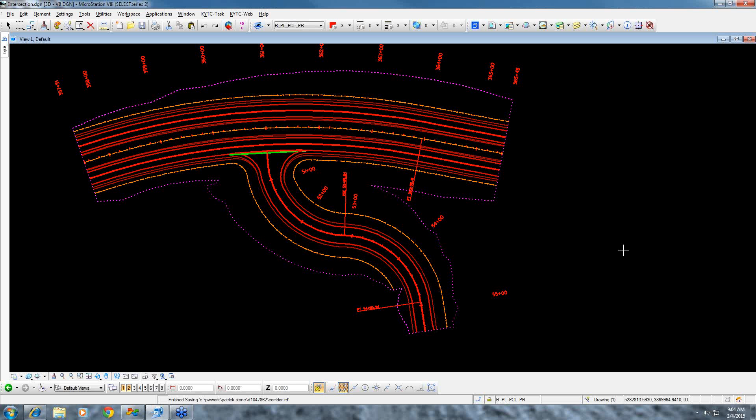First thing I want to show you is the area that we're going to be modeling. We get a lot of models in here that are just terminated right at the end. You just run this corridor, the approach corridor, to the mainline corridor, and they just terminate without any radiuses on them. And when you're cutting your cross sections and doing your quantities, you're losing this area right in here for the quantity.

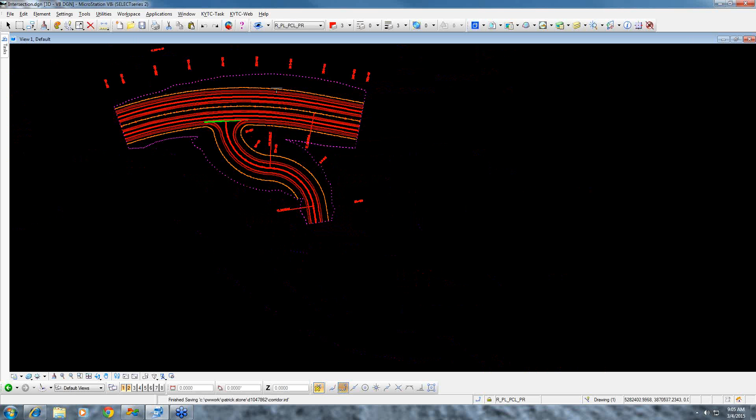So anyway, whether you buy into modeling the radiuses or not, I'm going to show you how we do these, and we'll go from there. So I've already modeled the left side of this approach. And when you're standing on it, the stationing on this is running left to right, of course. And I'm going to be talking about the left radii and the right radii.

You're standing here or you're driving down through here. This is going to be on your left, this is going to be on your right. I know most people understand that, but just wanted to point that out to avoid any confusion with which radiuses we're talking about when we're going through this.

We're going to be using the multi-center curve command, and we'll use the three-center curve. I know it's kind of ironic, but that's what we're going to do. And I wanted to point out another thing as a side note.

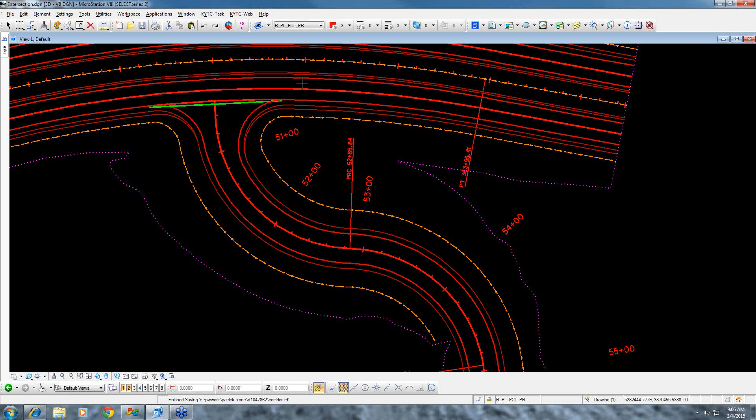If you go through and you model these, the approach is in a curve, the main line's in a curve. Now, if you just go through and model this and use secondary alignments where it's going to come out and hit this, you're going to have this area in here, as you can see, where you're not going to get all the way up to the edge of pavement that we want.

So in this process, what we're going to do is make a corridor over here. We would make a corridor here, corridor here. We've already got an approach corridor and a mainline corridor. And I'm going to show you how we've been doing this with the template. To go out, we're going to intersect the edge of pavement coming up here as a corridor point. And then at this point, we're going to come down here and intercept the vertical and horizontal alignment of this road.

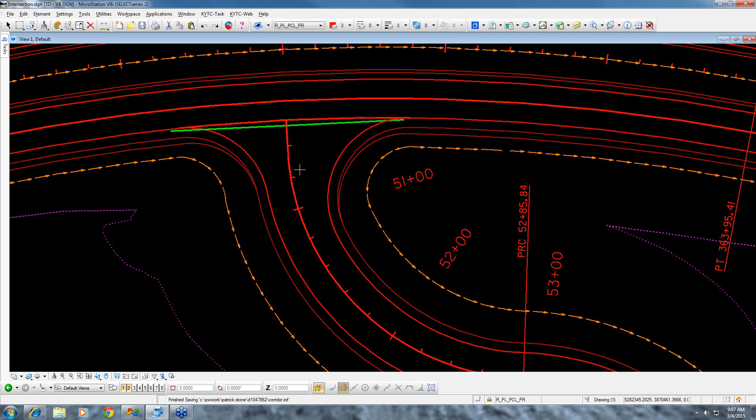And this is the same method I'd use on my entrances or any kind of approach, entrance, anything. I like the 3-center curve. It's pretty handy. First thing I want to do is show you the templates that we're going to be using. So let's pull up. And I'm going to be using the example 4-lane median.

I just basically took a job we've been working on and jammed this mainline template on it because it's got ditches and stuff on it, just for presentation's sake. You can see how it works. Really, we're in a cut. All you're going to really see is this situation right here. We're dealing with this right side, and all we're going to do is tie it in to this edge of pavement right here. The alignment did include going across, but for the purposes of this webinar, we're talking about this radius here.

And these are the templates that are delivered with the standards. This other template I'm going to show you is a job-specific template that we used. It's just a basic approach template. What I'm pointing out here is you've got your edge of pavements and everything we're going to tie into on both of the templates, the approach and the main line. And it works the same way. It's no frills. These are all going to be in a cut. We're in a pretty good cut here, so you're not going to see any of these other ditches formed. You're just going to see the V's.

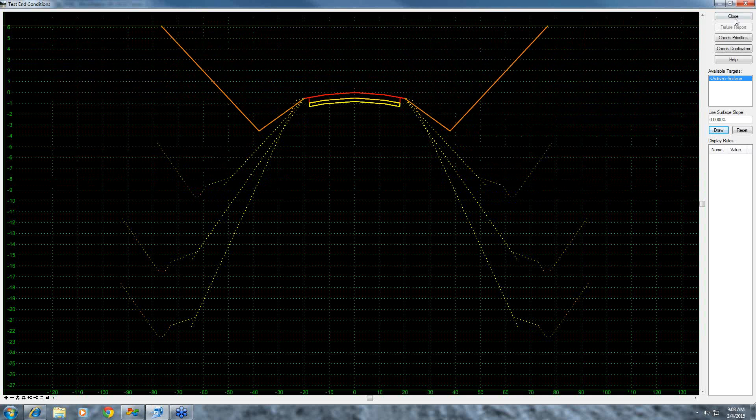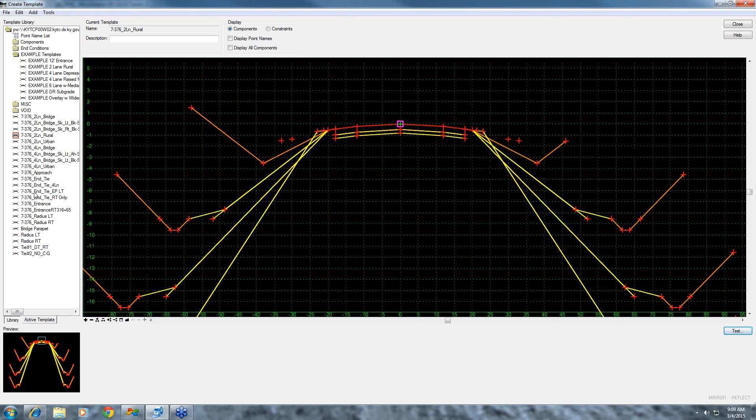And then I want to show you the radii template. All I did was take this template right here, copy it, trim off all this stuff so all the point names would line up, and made a left radius and a right radius. The only thing I had to do was move this point. I took the constraints off this left edge of pavement, and then I named these points tie points. You can call them whatever you want. I like using tie because it's easy for me to remember when I'm telling this point what to seek as far as the edge of pavement or the center line.

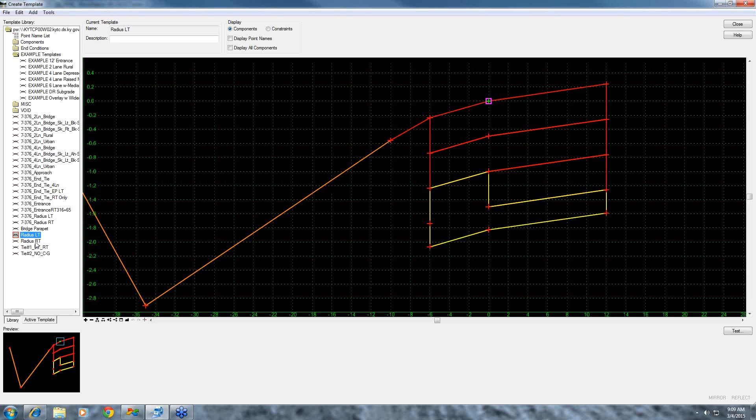And we've got the same thing going on for the right radius. All I did was mirror it and change the names, so it said right EP. I leave all these at tie. I guess you could label it left tie, but it doesn't matter what you name it as long as you remember what you named it to tie it down to.

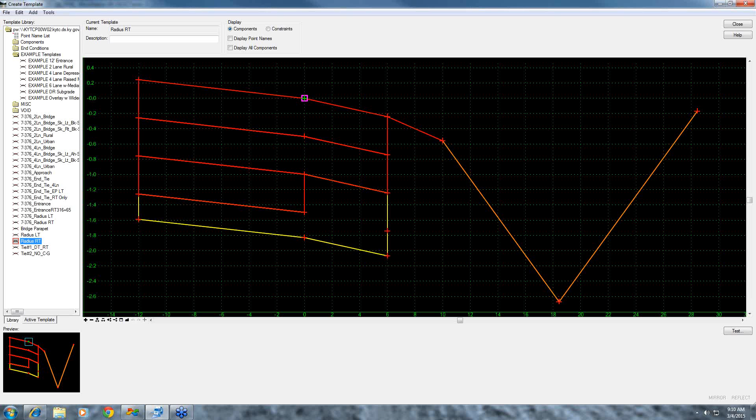Okay, so the first step is we're going to set up both of these corridors, the mainline corridor and the approach corridor. And we're going to run them, and I'm going to show you how they just tee into each other and how we're going to clean it up. I just want you to remember how the radius is smoothed out here and everything.

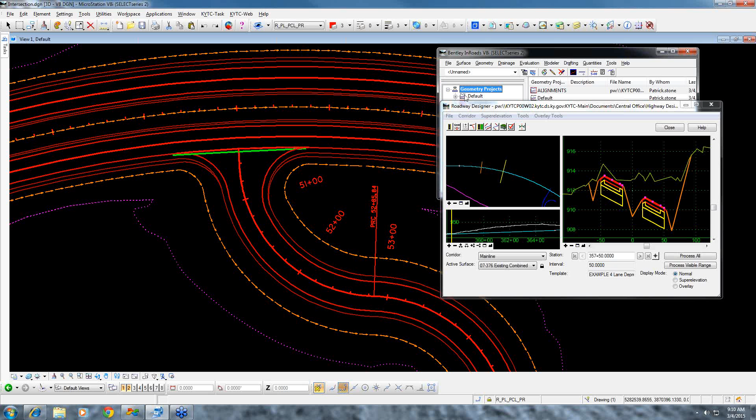And for what we're doing here, we're going to talk a little bit about the target aliasing and the clipping from the models. I've set all this to clip none right now because I don't want it to clip at this point. And we'll touch briefly on that. If there's interest, we can probably set up another time to go more in depth on all that clipping.

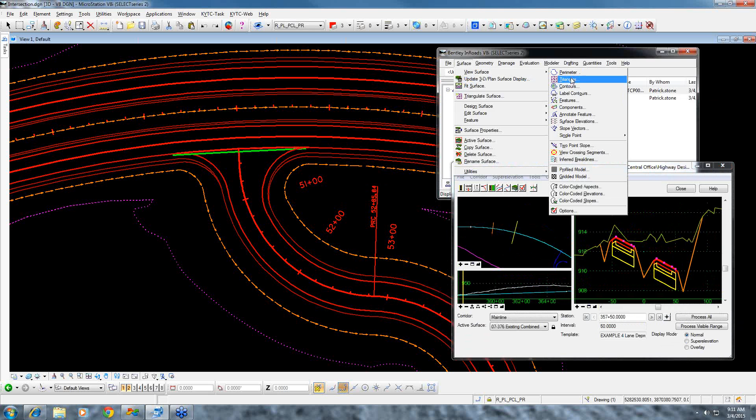I'll be viewing the proposed triangles with the mesh, if I can remember to do that. We'll do the mesh, and like I showed in a previous webinar, it's going to make all those triangles as one. It's kind of like having your graphic group on. It updates quicker, it deletes quicker. I like the mesh. I haven't found a reason that you wouldn't want to use it.

So we're going to hop in another drawing. This is just a drawing of the finished intersection. I want to give you an idea of what it's going to look like, provided I don't mess anything up, which is a strong possibility. So let's jump into another file right quick.

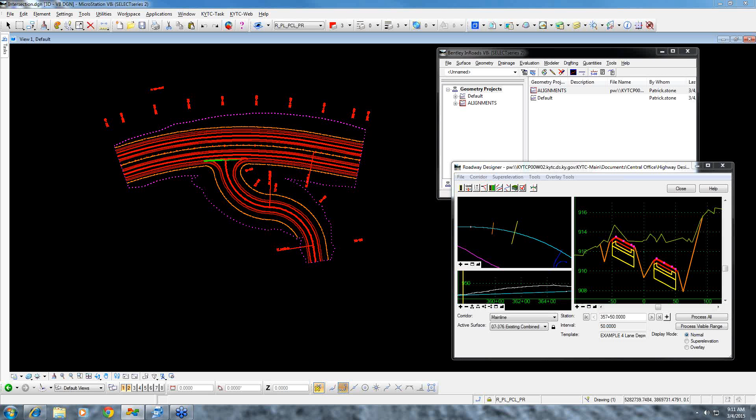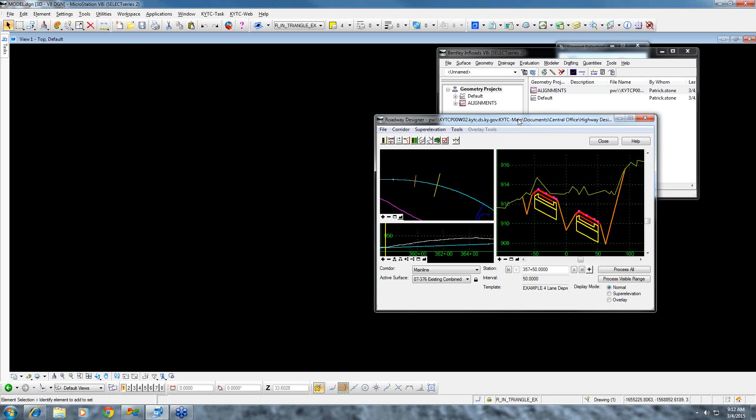And this is just a copy of the KYTC 3D seed file. I changed it to model because I didn't want to go in there and delete everything out and have to recreate that stuff. But anyway, let me show you what we've got set up here. We've got the mainline corridor set up and the approach set up and the left radius that I've already set up just so we can get through this in timely fashion.

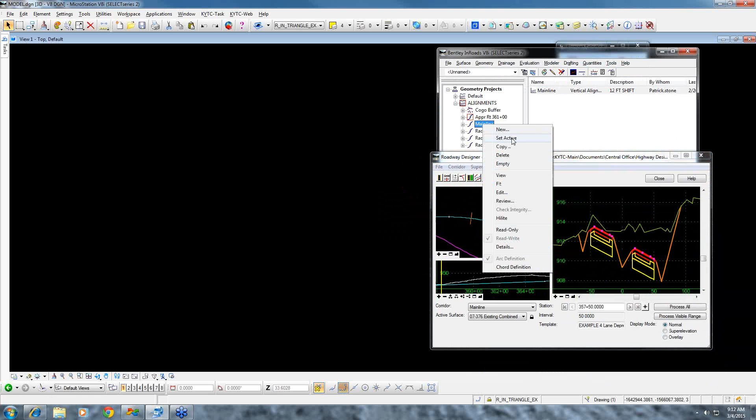First thing I like to do is go in and view the mainline alignment, and then I like to view the approach. Make sure we're in the right area. This is a decent sized job with a lot of approaches and entrances, but we're just going to do one of these. I just picked this one because it was in the horizontal curve, and we're just going to tie it in. We're basically going to be working in this area. So I'll try to quit rambling now, and we'll just run this thing.

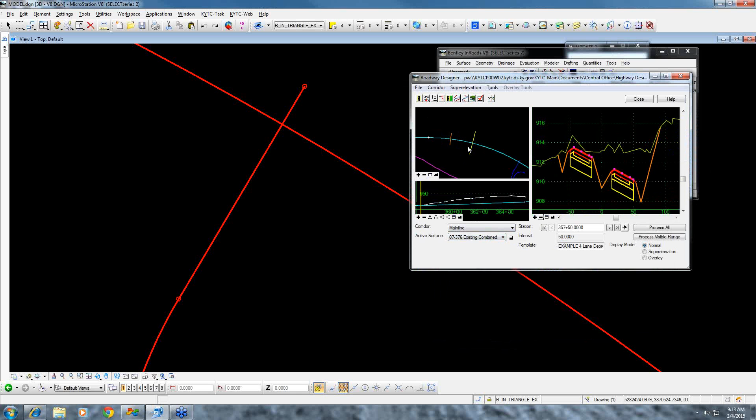If we're in the main line, we want this as our existing surface. We're going to run this down through there. And you can see the area that I've confined it to. I don't want to run the whole thing. And you can see it updating here. We'll go ahead and run this surface because I like to have a surface for each one and then run them together. So first thing we're going to do is do the mainline surface.

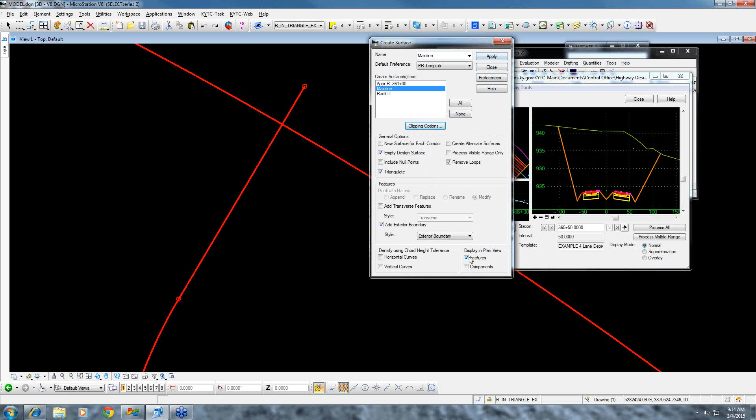On horizontal curves, it densifies just like it says using the chord height tolerance. I generally leave that off. I put event points in where I want extra cross sections cut, so I don't use it very often. We're going to set all this to clipping as none. Like I said, we'll talk about the clipping a little bit later. We're just going to display features at this point. We can go back and show components later.

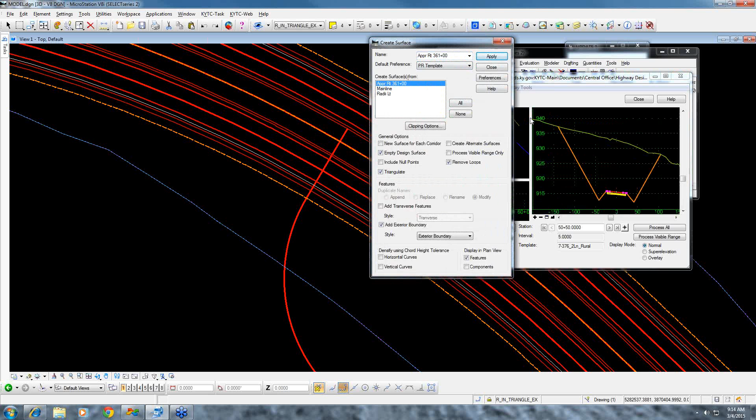Okay, and I just want to show you that if you turn the clipping on, we're going to have some of this clipped out from the approach, but we're not going to do that at this point. We're just going to run the approach. See, the closer we get to main line, the more cut we're in. So we're going to run this approach template and display it. And then we can show the mesh.

But what I want to point out here is we've had several questions of late over the feature filter list. I don't know if you're familiar with this or not. If you are, sorry to bore you, but I'm going to run through this real quick. What this does, like if you turn this lock on, I'm going to use the exclude from triangulation that we've set up down here. These are all set up. You can customize them. You can add to these and build your own.

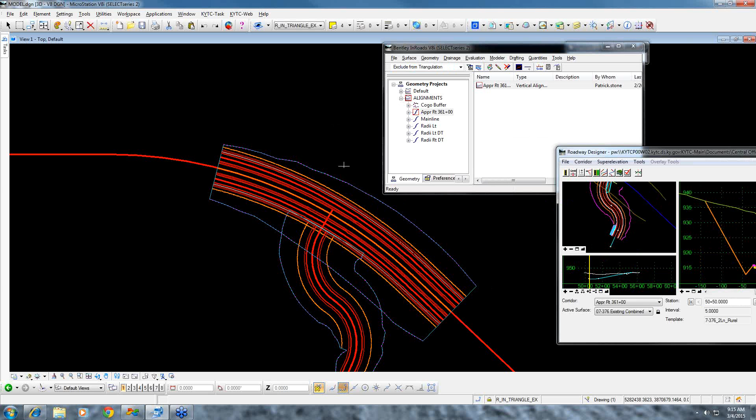What it's doing is it's going to turn off all the subgrade features for this one. That's the way this one is set up. But what you have to do is you have to pick a feature, you have to pick a filter, and then you have to turn the lock on. And I won't turn it on at this point. We'll view these triangles, and I'll rotate it up and just show you what I'm talking about. And I won't do every one of these surfaces. I know you don't want to watch me do that.

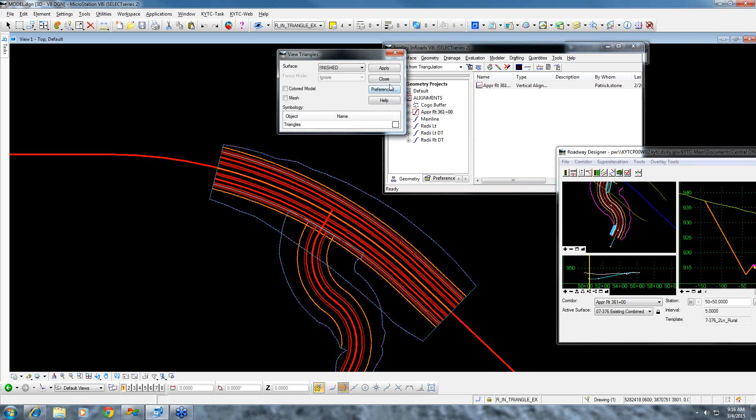But we will view it, even if I have this picked, I don't have it turned. Well, let me turn it off. I do have it turned on, and you can tell by the way it's turned off. So what it'll do, even with that filter turned on, or selected, not turned on, you'll see the subgrade lines. So we'll just view the triangles, and I'm going to view them as a mesh so they're easier to delete.

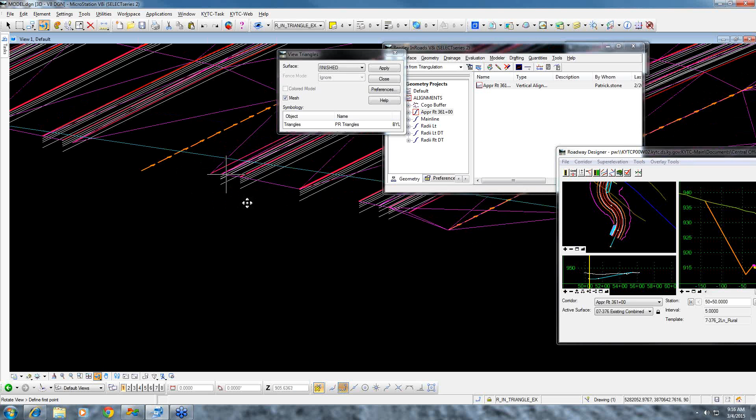And then we'll rotate this. We're just going to look at this end down here. And as you can see, you've got your surface, you've got your subgrade, you've got your rock, you've got all your triangles in there. I personally think that's kind of a pain when you're modeling and going through it if you're just working on the finished grade. And what we can do is if we turn on the filter, we won't get that subgrade.

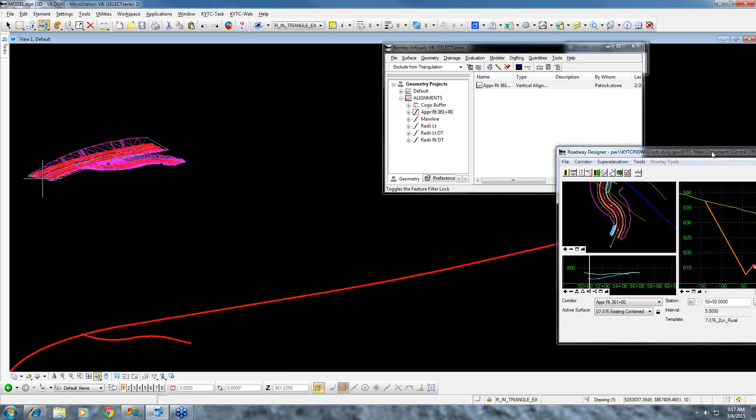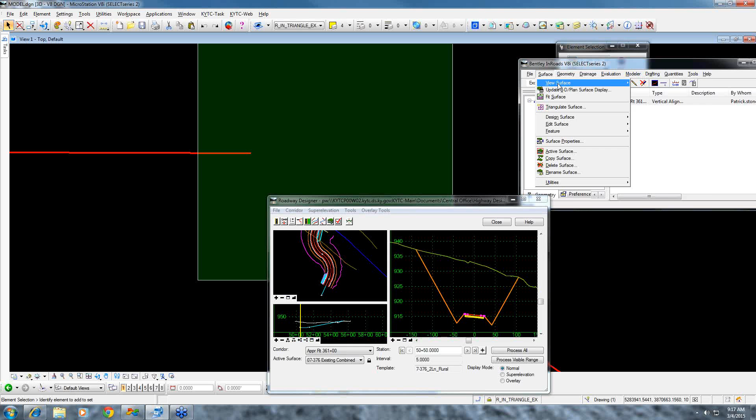So let me go back up to a top view. I want to get out of that. And I'm just going to delete this. And now we're going to turn that on. Make sure it's on there. And we will just do the mesh. We're not going to see any of that stuff. And I think it just helps when you're working in your surface you don't see that. I want to point that out. I know that doesn't have a whole lot to do with modeling the radii, but there you go.

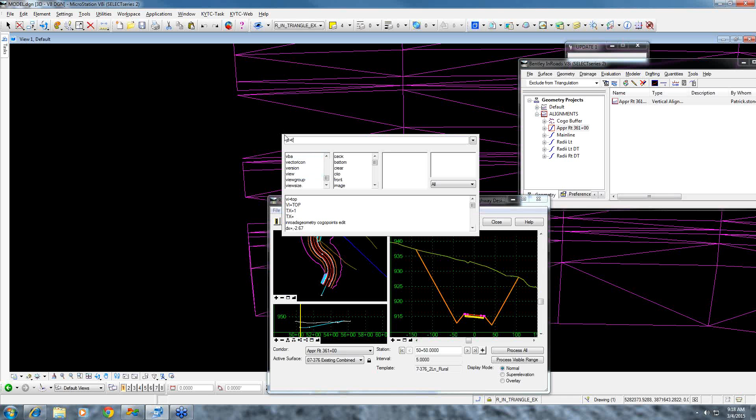Okay, we're going to view these horizontal alignments one more time. And the reason I like to view them is I've had trouble when you're building this secondary alignment, or the multi-center curve for the intersection radii. If you don't have the actual alignment, it seems to actually pick it, but it doesn't highlight it. It drives me nuts, because when you start adding these radii over here, the more times you pick, it'll just add.

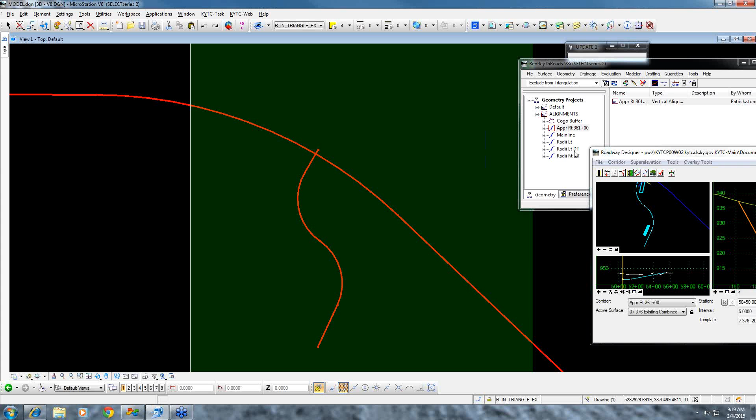Like if we name this one radii right, and then if I click it, it'll add a radii RT, and if I click it again, it'll add a radii RU, and then you'll go up the alphabet. You might end up with 10 of them if you're not paying close attention. It's not a big deal when you're only working on one intersection, but if you've got a whole job, you can end up with a bunch of junk in your geometry file, and you wonder where they came from. But if you see radii LT and then radii LU running down the alphabet, you've clicked too many times.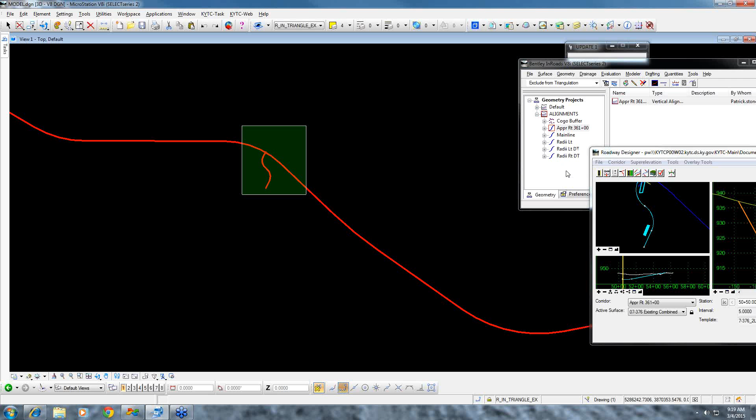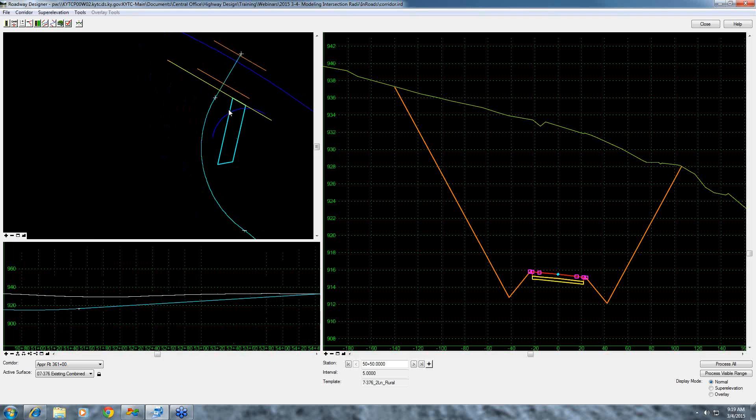And we can see most of this work that we're going to be doing in this view of the roadway designer. So let's go through, and I'm trying to take my time with this. I know I'm going slow, but if I move these dialogs around too quick, we found that I'll be talking about it and you won't even see it. So bear with me. We're trying to slow it down a little bit so I'm not talking about stuff that's not on your screen yet.

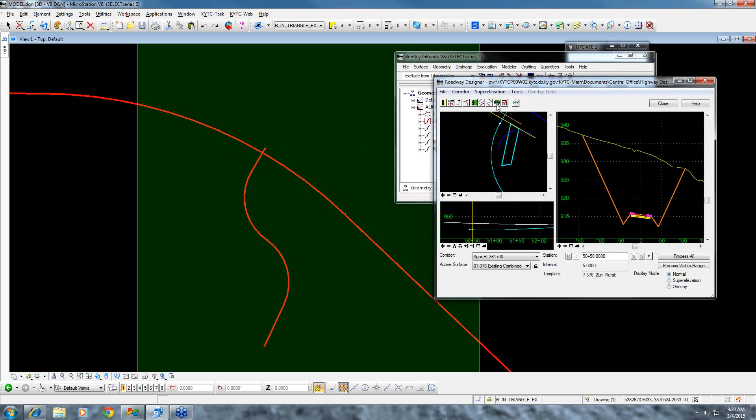So let's go and find the multi-center curve. Well, first of all, I'm going to run this. I like to see all the features in there, so I'm going to show them. And I wouldn't view all these features all the time, but for showing this stuff, I think it helps, so you can see what we're talking about. What we're going to do right now is make a horizontal and vertical alignment that goes from this edge of pavement to this edge of pavement.

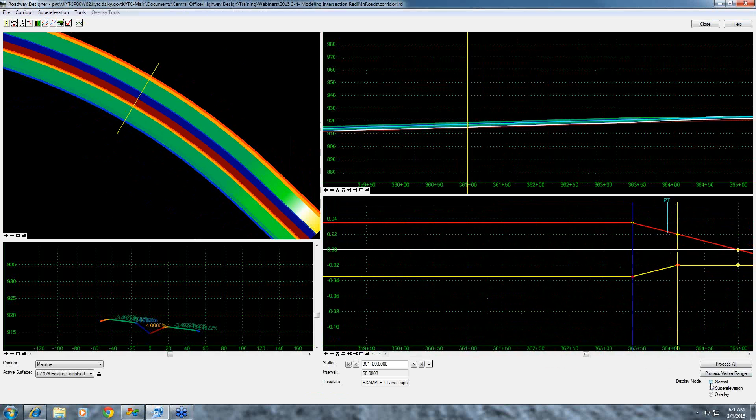And one thing I should point out too is I've already gone through and the super has been set up on these for the main line and the approach. And it's important that you put the super on now because you're going to be picking off points, and I'm telling it to drape it over the surface. So when I'm putting in this radius point here, you'll see that I say I want it to use corridor point, and then I'm going to use a surface.

Well, if this surface doesn't have your superelevation in, and then you add the superelevation, this alignment's going to stay wherever you place it. It's not going to follow this edge of pavement up and down.

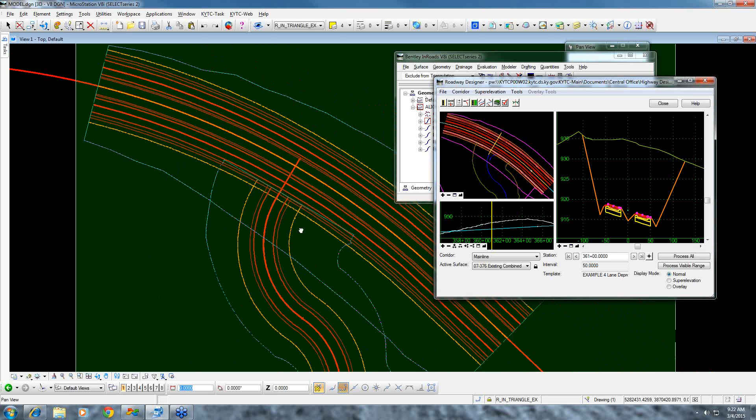So I just wanted to point that out to you. So let's go through and use this command. What we're going to do is we're going to use the one center. The radius on this is going to be 50 foot.

Now, the 50 foot on this radius was a decision that we made from the design criteria. You'd have to take into account what kind of curve you're doing, if it's an entrance, if it's an approach, what kind of vehicles are going to be on the road as far as where this 50 foot comes from. And you'll have to look in the geometric guides to see what you want to do. So we're going to make this 50 foot.

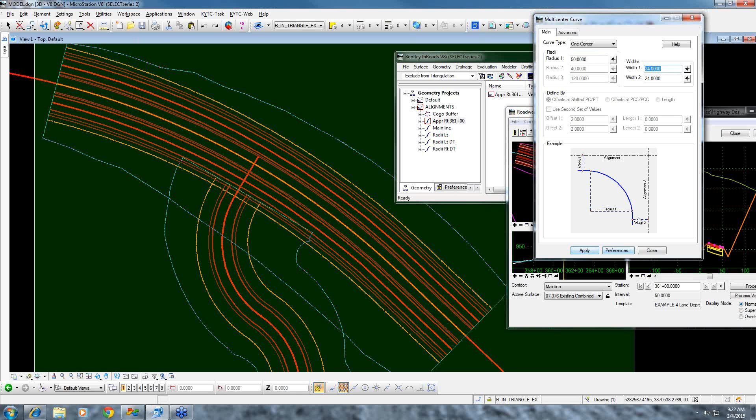And one thing I want to point out, this offset right here, the help does a good job explaining this. It shows you where the offsets are going to come from, from the centers of your alignment. Now this center line is over here. I don't want you to get confused with the center line of this driving edge, because it's from the center line of your alignment to the edge. So we're going to go 50. You can click this, from your center line alignment to the edge of pavement.

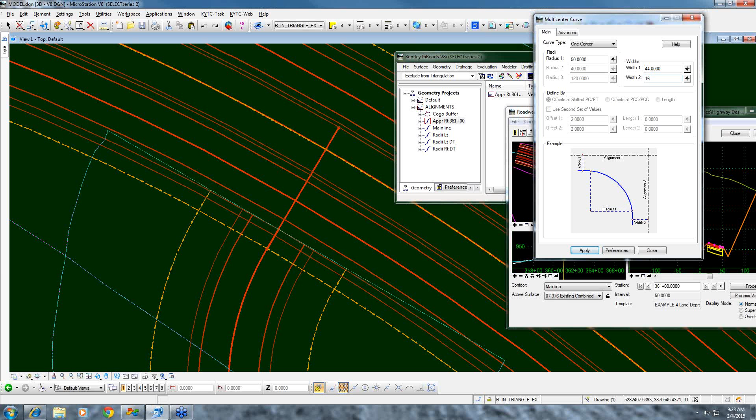I know that this one is going to be 44. This is 44 foot. Not 444. 44 foot. Then the second one off the approach is going to be 16 foot. I don't have to fill out the rest of this. Go to the advanced. What I'm going to call this one is going to be radii right.

Now, it's up to you how you want to name these things, but what I usually do is I'll start out with, like this one would be radii right, whatever the station is, and then radii left, whatever the station is for this entrance or approach. And you can put that in the description or wherever you want. We're going to set this to centerline main. We're going to turn on the create vertical alignment.

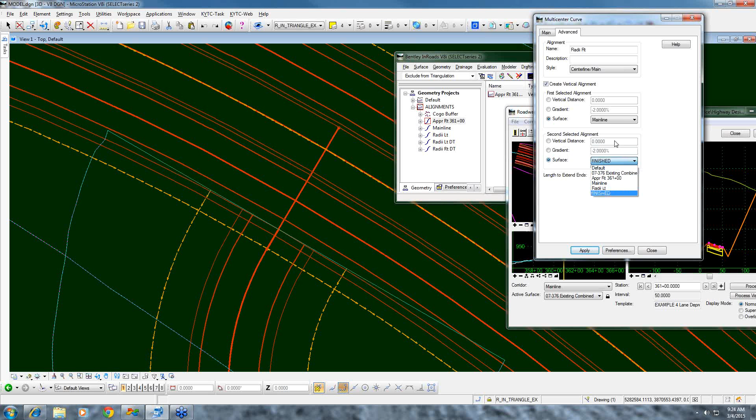Now I want this to be using the main line that I ran, and for the secondary alignment, I want that to be the approach. And that's because this came from the main line, that came from the approach. Get that off the screen. Now it's going to come up and identify the first alignment. We identified that one. We identified the second one, and which quadrant. And make sure you read your prompts down here. So if you don't accept it, you get nothing.

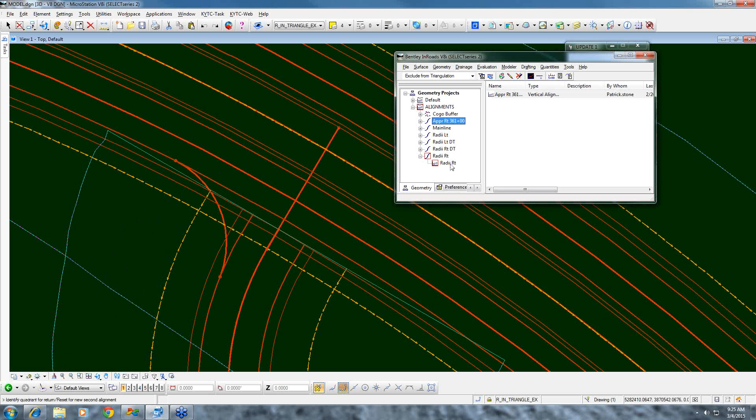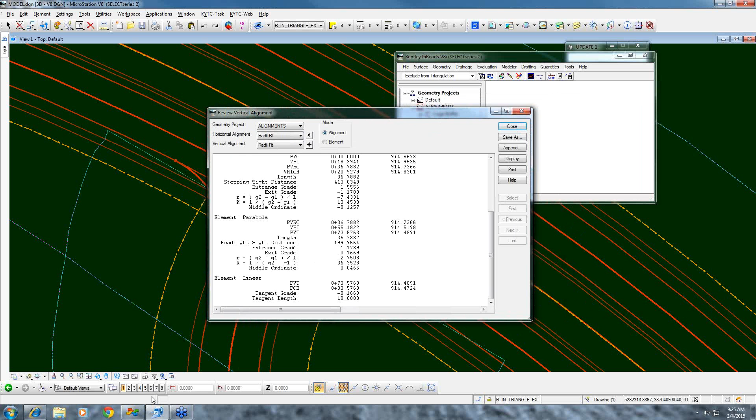And a lot of people at this point would like to review these. You know about what your elevation range is. You can look here, and what I'm looking for is to see if I've done something incorrectly, that something was wrong with this feature or this feature that shoots off, you know, down into a hole somewhere. You don't want elevation 0. And another thing you can do is just open up another view, close some of this stuff down.

And what we'll do is I'll cut a profile. So we'll just do profile, create profile. What we want to see here is the mainline surface and the approach surface. Let's make sure I get a decent preference. I don't care about the existing on this particular deal. Let me see where I put that. Okay.

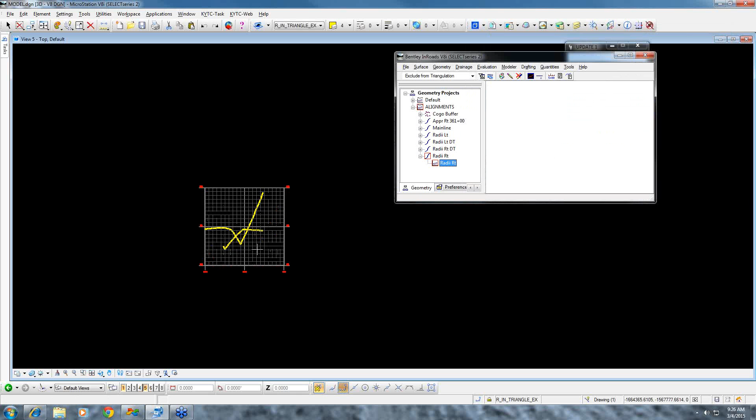Now what we've got here, you can hover over this and it'll show you which approach, what's going on here. You can pick it. This is going to be the main line. Let me do the information. It's just giving me that, but if you hover over it, it should show you surface main line, and that's the surface approach. This is showing the center line of that radius. So if you go back over to view 1, it's a profile along this.

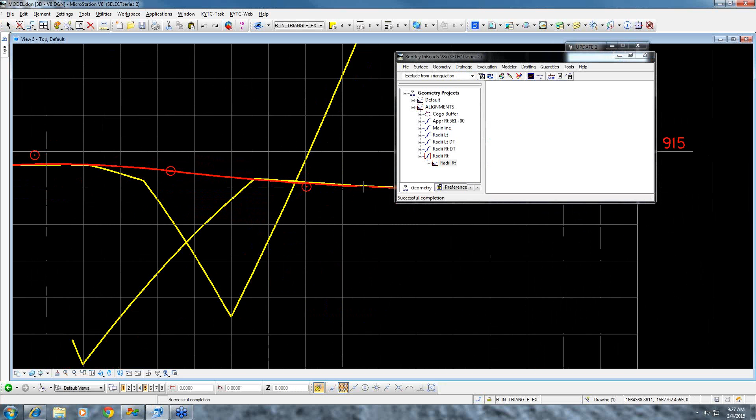Now we had some confusion the other day on this of exactly what it was, and some people thought it was actually the 2 center lines and couldn't understand why it was dropping down this ravine, if you will. So anyway, let's view that. So you can see that we're lined up pretty good. I'm going to leave that the way it is. That's the way I want it. I want to see that. I've smoothed out that radius down through there.

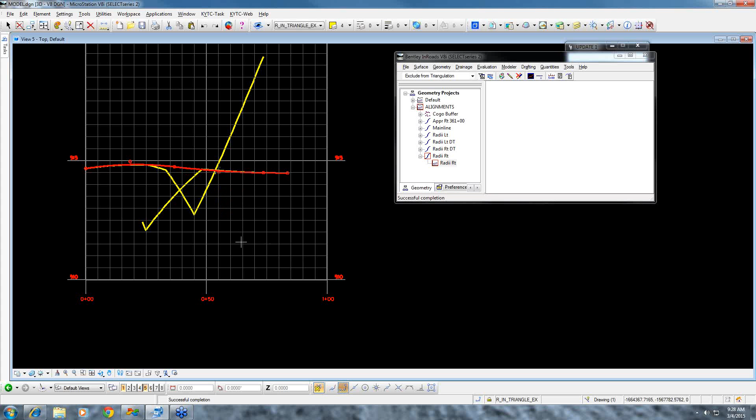Okay, so we know this one's good. What you would be looking for if it was bad, like you may have a spike or something in your DTM, in your proposed or the approach DTM, and then this thing would shoot down, have a big V in it, and you're not going to want that because it's going to be in your model. So you want to check for spikes.

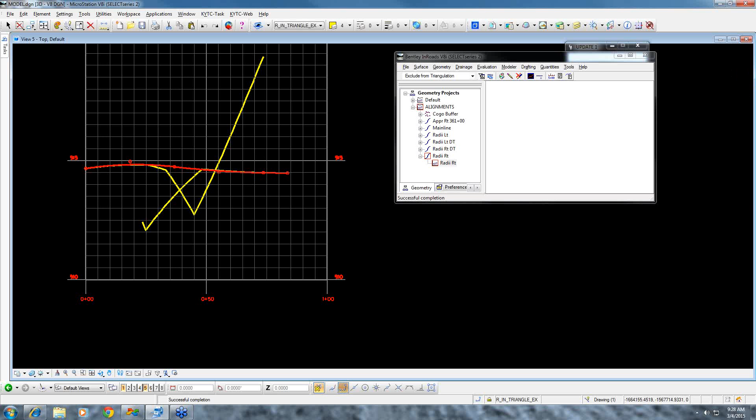And now we got the horizontal vertical alignment. For time's sake, we're not going to do the other side, and you can do this a lot quicker. I'm trying to take it as slow as I can so we can get it recorded, and you can see the prompts. So we've already done the left side. The next step is just going to be to create the corridors. Hop back in the top view.

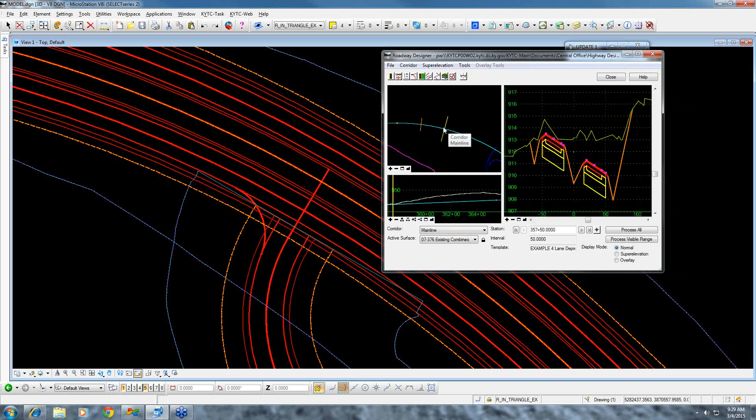So what we're going to do now, and as you know how this thing works, this is the roadway designer. You pick it from Modeler, roadway designer. I'm sure everybody's used to using that thing. And then we're going to manage the corridors. We're going to create a corridor here, and we're going to call it radii right.

Yeah, this thing lags when we're broadcasting, so bear with me here. Okay.

I don't care what the surface symbology is. It's not really going to matter. The alignment is going to be the one we just created, the radii right. The stationing, I want to run it the entire length. And don't get balled up on the stationing. I've seen people go in and try to match the stationing with the mainline stationing. It's not going to matter.

And it doesn't really matter if this alignment runs from left to right, from the main line to the approach or the approach to here. You can manipulate these around and only use one template. Just make sure your left's on the left and your right's on the right, or you'll have features that look kind of funky in there. And we're going to run it the whole way. So we're going to add this. We've got the radius. Then we're going to go to the next step.

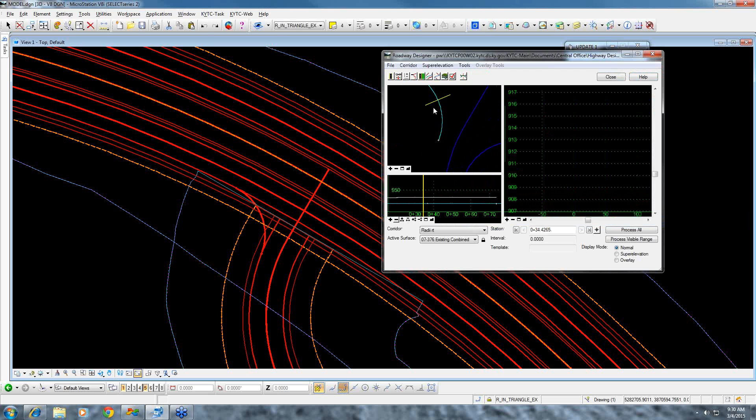You can see up here we've got this going up here. Now, if you see what I just did where I moved this down through here, you got to be careful when you're doing that because it can mess up what your options are. See, I went to the end because it's on 50 and it's not a very big curve. It's jumping all over the place. But anyway, you can either change it like that or you can move it. I'm going to run this the entire length.

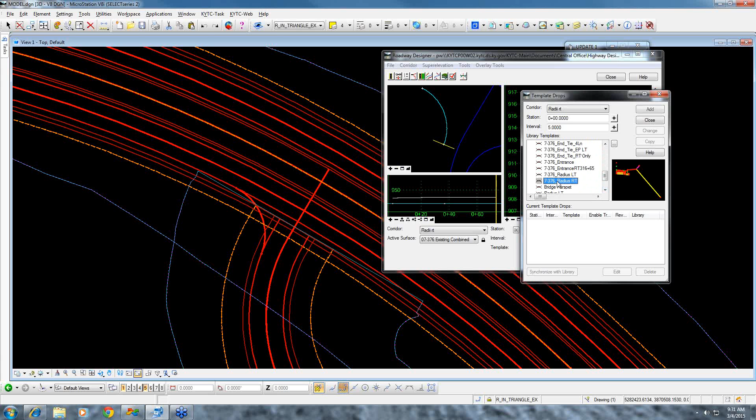This is a 50-foot curve. The way I've been liking to do this is I do a tenth of it. I think that's pretty standard, so it'll be a five-foot interval. What that means is it's going to drop a template every 5 foot and hopefully do what I tell it to do. Now the template that we're going to use here is going to be the radius right, because we're on the right side, not that one. This one right here. Okay, and you can see what we're going to get there.

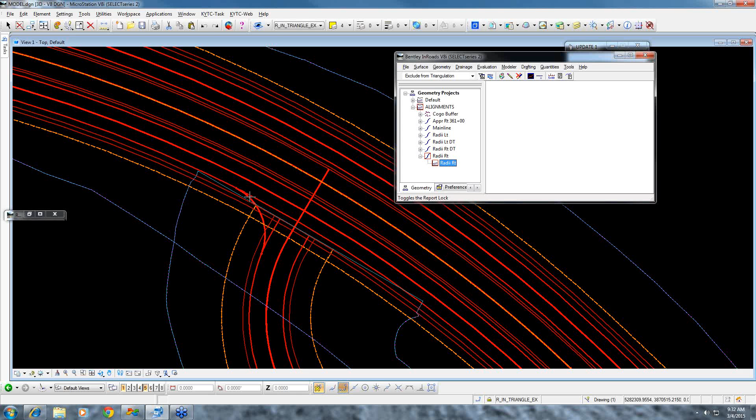Now for time purposes, I'm not going to model the whole thing and show you every step. Originally, I was going to do this part and then show you. But what we're doing here is we're going to tell it with our controls to go in here, and I want the tie point to intersect the edge of pavement. So we'll pull the modeler back up, and we'll use our point controls.

What we're going to do is set up a point control here, and like I was saying earlier, you can pick these points. We want to do the tie point because we're going to have this point intersect right down through here, and it's going to go from a sliver to a pretty good size chunk. We're going to do both because we want it controlled with that edge of pavement, the horizontal and the vertical. And on this one, we're going to run a corridor point. The corridor is the main line that we ran before, and the reference point is going to be right outside edge of pavement.

And this is where you can get in trouble. You know, if you're picking these, which you can't with this corridor, if you pick the base, it's going to do exactly what you ask it to do. And then you'll see a bunch of problems in your model.

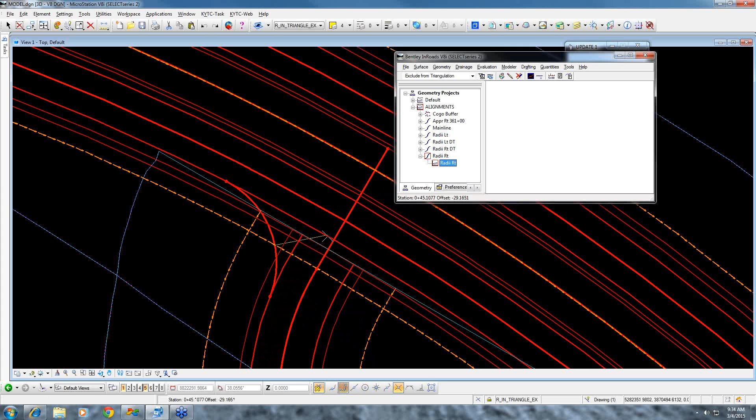Now the start station limit is going to be at the start, of course, but I want to stop this particular feature when it hits the center line because I'm going to change controls at that point. So if you hold the control key down, it'll take you to the plan view, and you can scroll down through here, and I want to line up this with that point right there. We'll do the intersection point right here. Okay, and that's 47. We're going to add that point.

And now what we're going to do is take this same tie point, and I want to make it hold on to the center line, horizontal and vertical alignment. So we'll make this alignment. We want it to do both again, and we want this to be the approach. Now it'll keep that point there and run all the way to the end. So we're going to add this.

And now when we run this, you can see it's starting to form what we want. See how it went? And now that's the edge of pavement, and we've got this little point right here. And generally what we do is you go in and add your key station there. And you can just hold your control key down on this one too, go down and pick that exact point. You could type in the station. I like to use these. I think it's easier. And we add it. Now when we run through it, it should be a nice crisp corner there.

So with that done, we've got it constrained to our edge of pavement, and we've got it constrained to our center line. What we're going to do now is set the parametric constraint. And maybe the best thing to do is to run this and show you the problems we're going to have, because we're going to have a problem right here with this paved shoulder, and the ditch is not going to line up for sure. So we'll start one with the right radius.

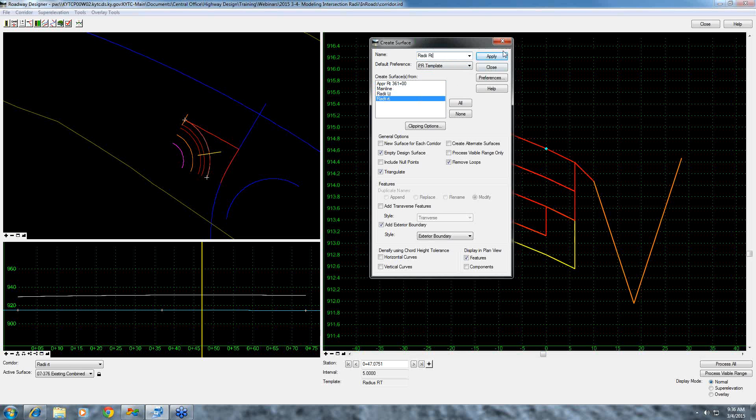See the problem we've had: we've got the edge of pavement, but we've got an extra shoulder point here that I want to use a parametric constraint to fix. This is 4 foot wide here. I want it to be 0 here. So I'll take a parametric constraint and constrain that to this edge of pavement and make it go from 4

to 0. Now to fix this, I'm going to assign this to this ditch alignment that I'd already made. That way it'll smooth this out through here. So let's go through and we'll set up the parametric constraint first.

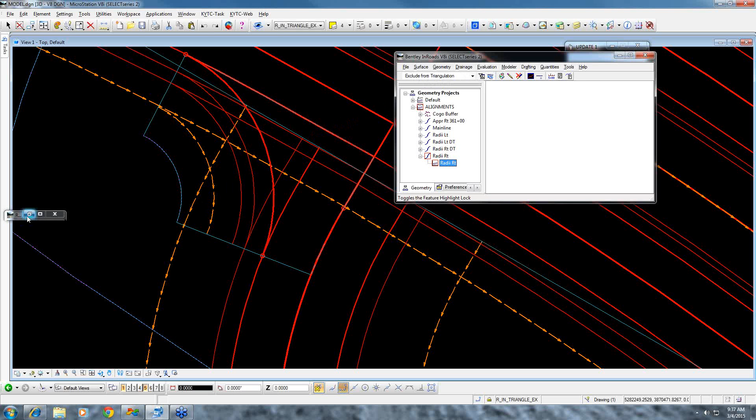When you start setting up this parametric constraint, we're looking for earth shoulder, and I know that I'm tying the earth shoulder down to the paved shoulder. Be careful when you're doing these, because earth shoulder width, earth shoulder slope, depends on what you want to do. I'm going to run it the entire length because I want a constant taper. Do it however you see fit.

And you can see once we add this in, how it's pulling it in there. So you don't have to view it every time to see what's going on. Now our ditch is still messed up because we're going to have to apply the point control to that. But that's how you would fix that with the parametric constraint.

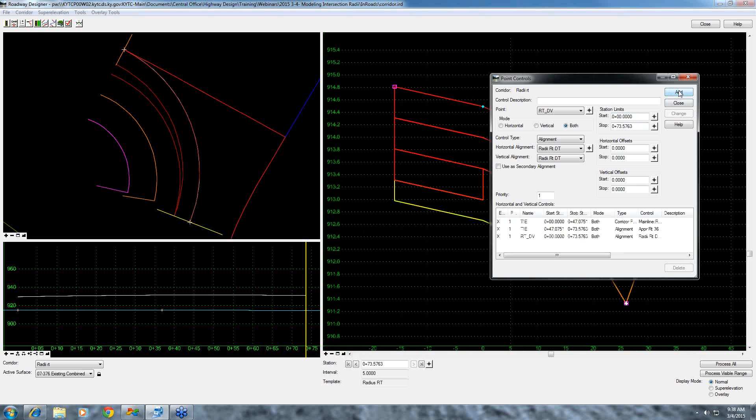Now let's add a point control to, I think it's called DV. Yeah, right, DV. And I'm going to control both of them. I know Wendy showed in a previous webinar that you want to do your vertical and then you're not messing up your slopes. But in this radius, for this presentation, I'm doing both. And I'm going to run it the entire length. And then we can see how it moves out.

Okay. So now we've got the point control set up. We're going to be ready to combine all these surfaces.

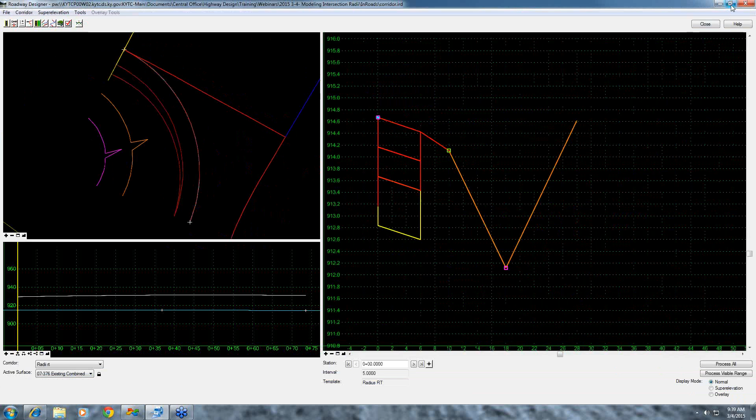Let's just delete all this. And like I said, I already had the left side created, so I don't have to worry about that one. We'll go ahead and make a radius right. I'm not going to display it though. Okay. Now we're going through here and we're going to make these puppies.

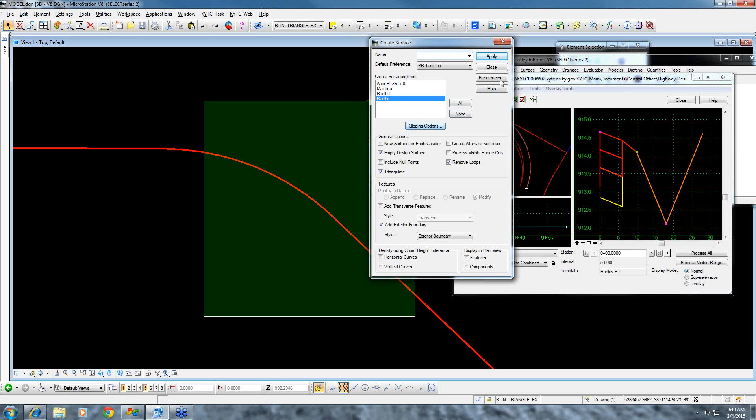We've got several things that we need to fix. The clipping options, I want to briefly touch on those. The first thing I'm going to do is talk about the target aliasing. I think this can be confusing. You have to set this when you're setting this up to the different corridors. So let's set this to the mainline corridor, so you can kind of see what's going on here.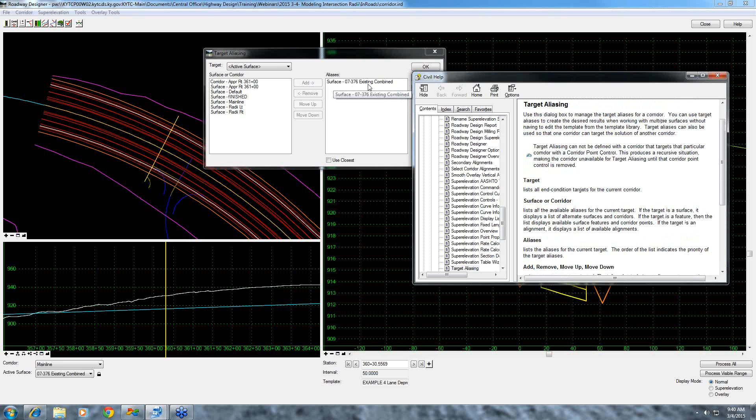So we want to go to target aliasing. I want to go in here, and on this one, all I want this to find is the existing combined. It depends on what you're doing. The help on this is pretty strong; it explains pretty well what's going on. So if you get confused on this aliasing, which I do, I get confused on it, just look at it. It's pretty helpful.

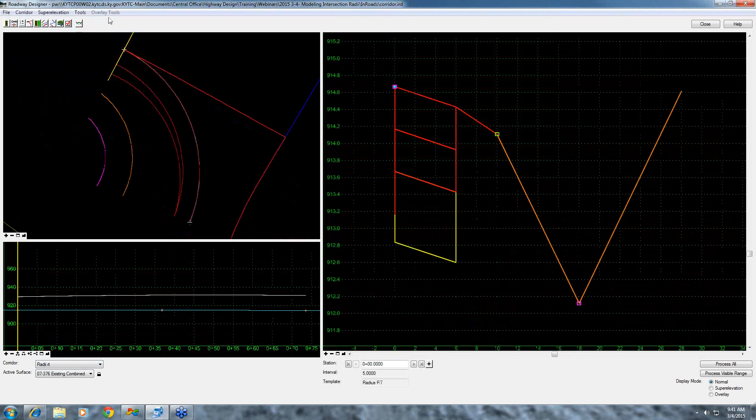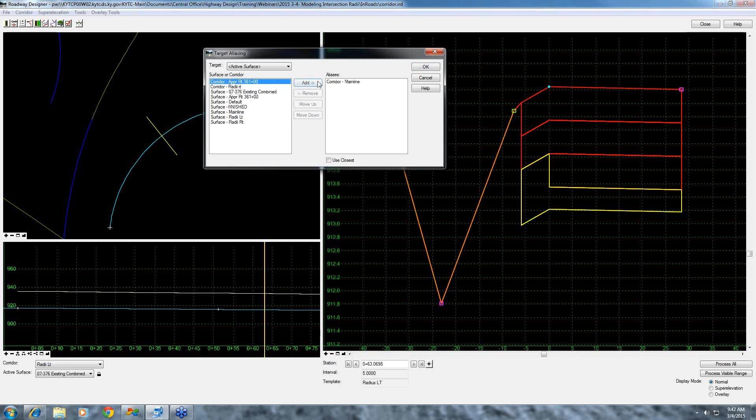And the last thing we want to do is you always want to give it the surface. Because if it can't find anything else, it'll at least find that existing combined. Let's do the same thing on the radius left. Once again, we're going to do the corridor mainline, corridor approach, and then if all else fails, that. I think the only one I haven't set up is the approach. So on the approach, we want the corridor mainline. We want the surface existing combined.

Now I'm going to use closest, and the reason I'm doing that is over here in this curve, where these two intersect, it can get a little funky because we're sharing a line here from the mainline cut to the approach cut. And just remember one thing, when you turn on target aliasing, you're taking control from the program, and you're telling it what you want to seek. If you get these out of order, you can really drive yourself nuts.

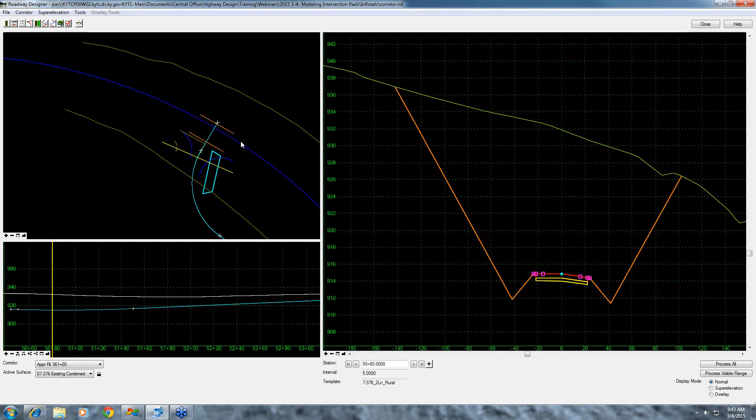It searches on these target aliasing from the top to the bottom unless you turn on use closest. So if you wanted to find the existing surface first, you would pick it, move up, move down. Another thing that you have to do is, if you don't want a bunch of lines going up through here, you have to turn your clipping on. I set them to clip all. You can do less, debatable, but that's the way I'm rolling with it, and you do that through the Surface tab.

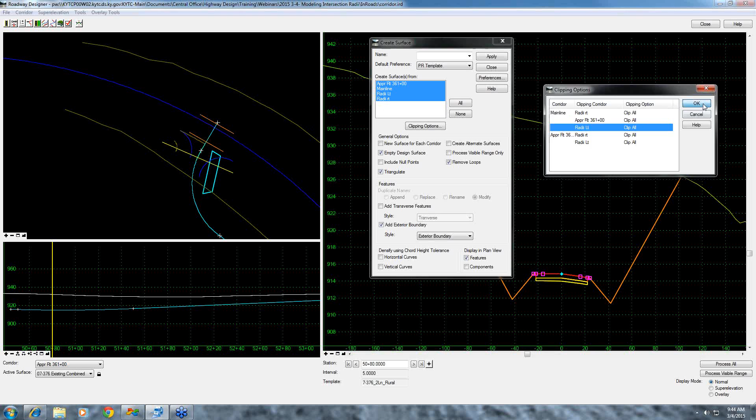You highlight them all, or select all. Your clipping options. Let's turn the features back on before I forget to. And we're going to set them to clip all. Now you can tell this is the order that they're in to clip, the priority. So if you get in here and you don't see something as a corridor, you'll do like I've done before and you will have accidentally put the surface in there. So go back and make sure you've selected the corridor. And then we'll run this puppy. We'll call it finished.

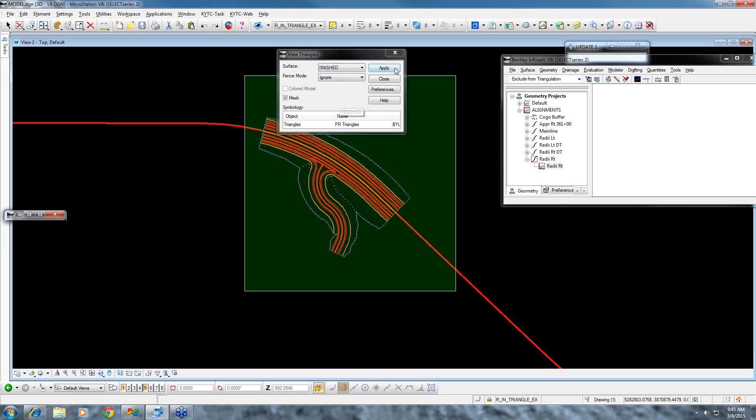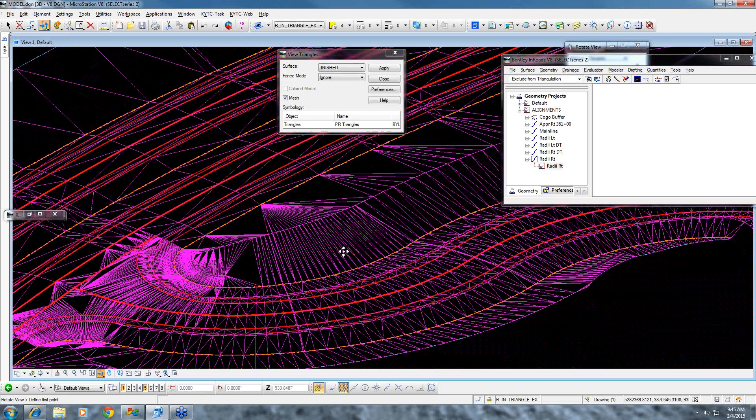Okay. Now we can view the triangles on this. And you can see we've got everything coming up to the edge of pavement and doing pretty much what we want here. We've got our ditch in there going around here. And that's how I work through these and save them.

One thing to keep in mind when you're doing this surface is this is a finished surface. Where I've clipped those components out, it's going to mess up your subgrade. You're more than likely going to clip out those subgrade components. So when you cut your cross sections, just be aware of that.

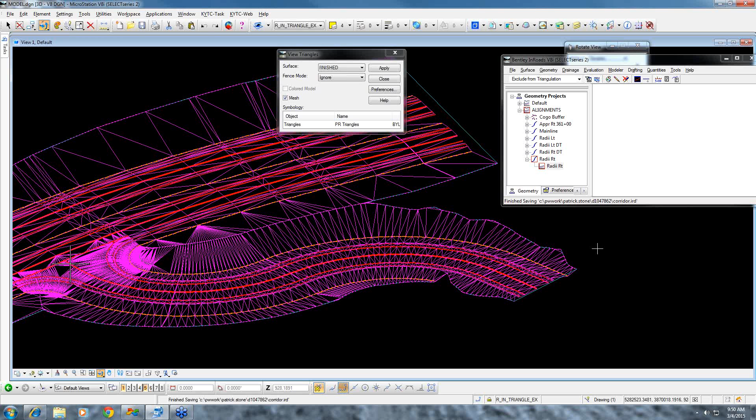What types of radii do you currently model? Looks like we've got most of our answers in there. Close that poll and share. Looks like most people are saying that they actually do approaches. Quite a few people doing major intersections, and some people don't do it at all.